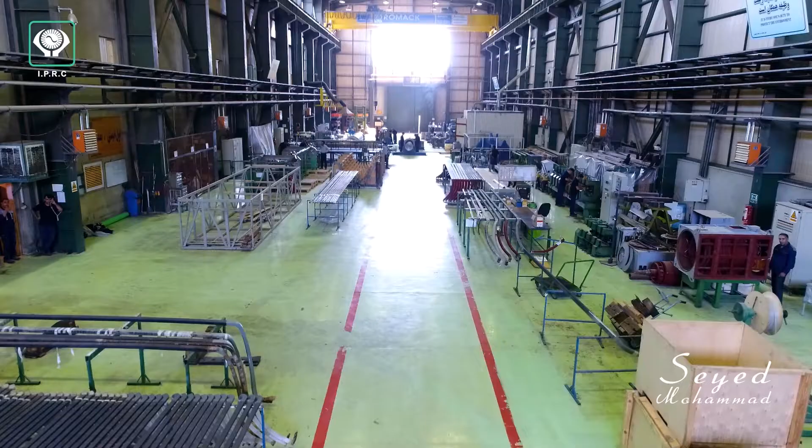This company, which is one of the affiliated companies of the Ministry of Energy, was established in 1981 under the name of Fundamental Management of Tavanir Repairs, whose goal is to support the production of sustainable electricity with the policy of specialized repairs and also be present at the front line of power plant repairs.

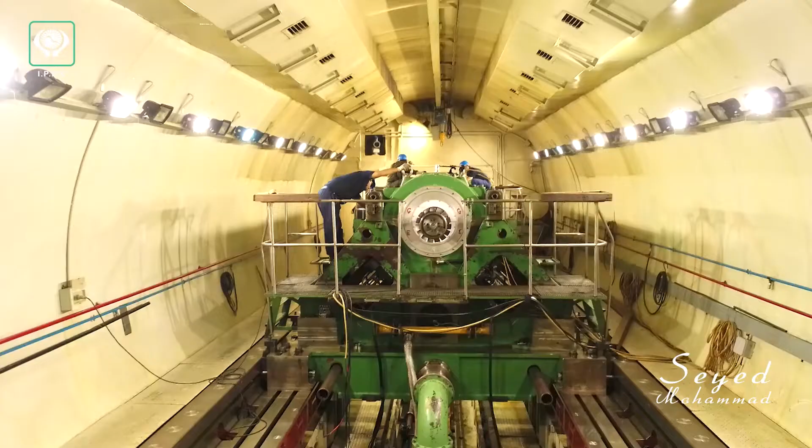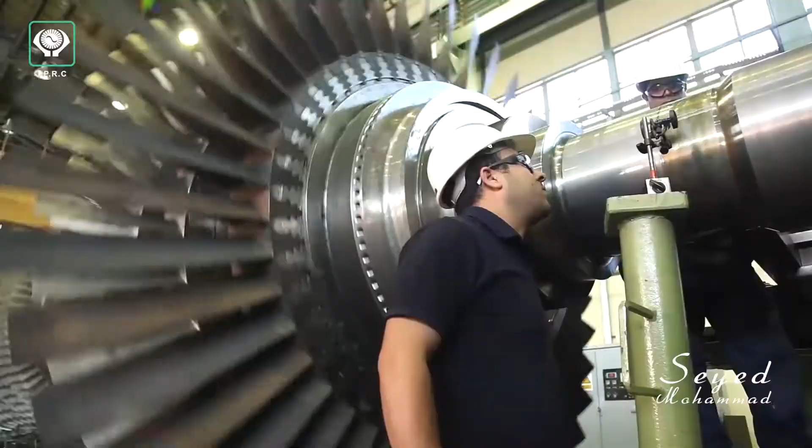After several periods of changes, the name of the company was finally changed to Iran Power Plant Repairs Company in 2002. Now, Iran Power Plant Repairs Company, more dynamic than before and with a competitive strategic look at the regional and international levels, with its experienced specialists in the country's power industry, continues its activities to achieve self-sufficiency and meet national requirements.

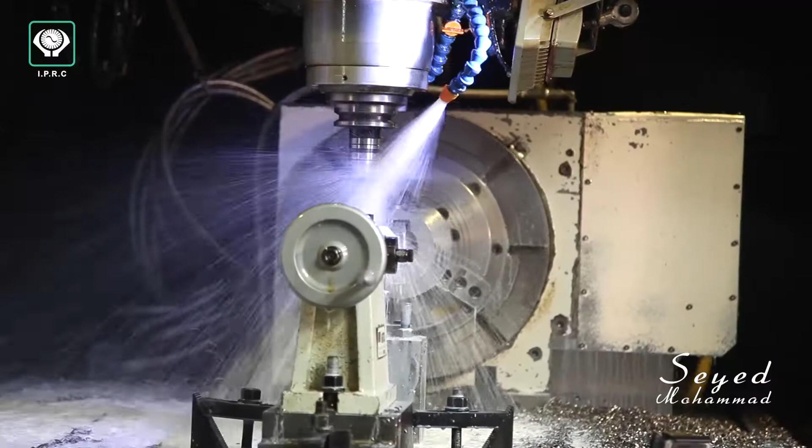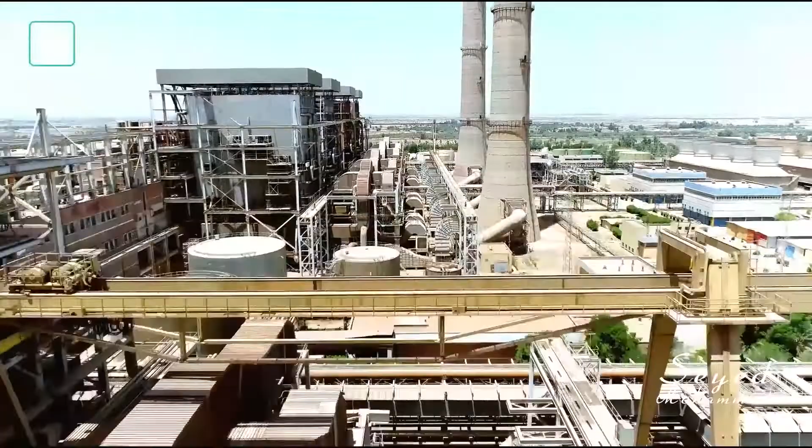During several decades of its activities, this company has successfully accomplished countless power plant projects inside the country and neighboring countries, whose results are highly precious experiences for the company. The existence of these unique experiences as national assets, especially in the range of basic power plant repairs, petrochemical units, refineries, and other industries, is considerable.

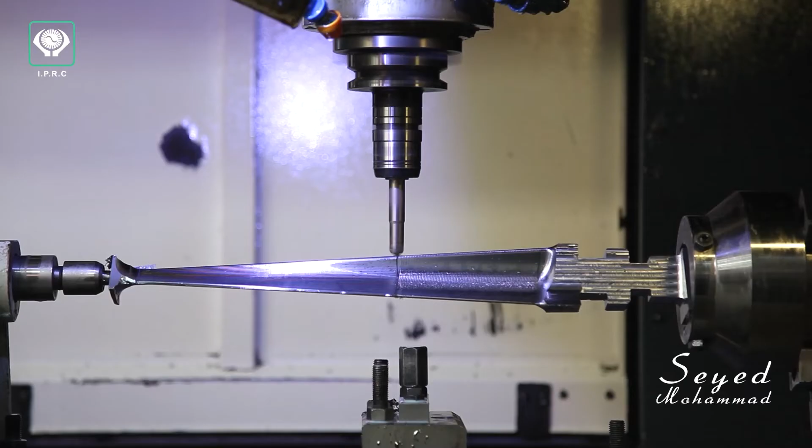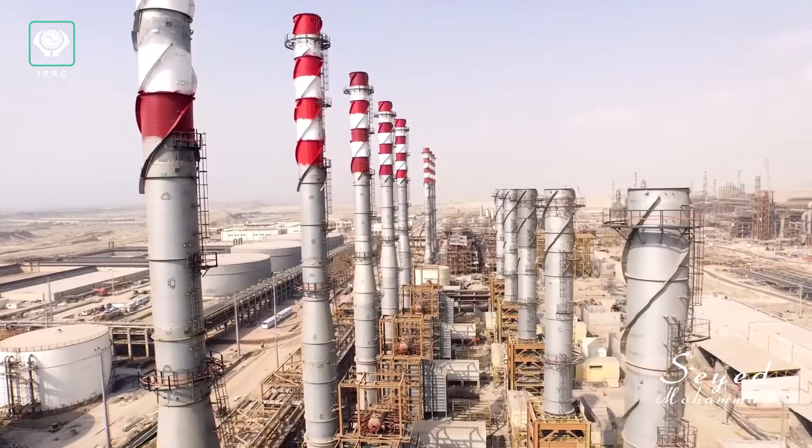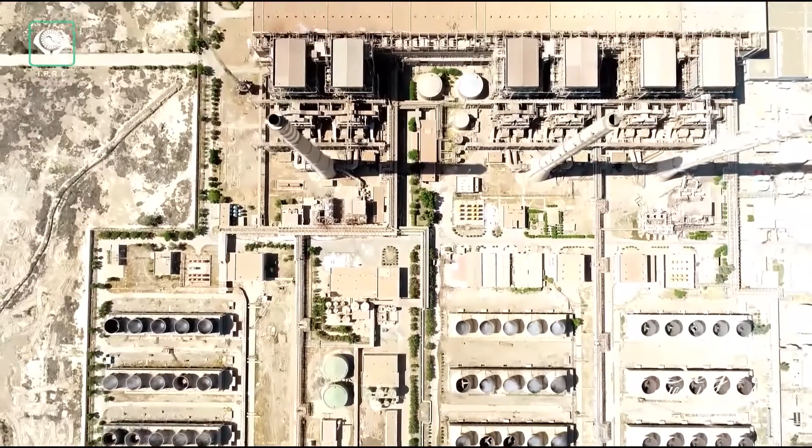The most important activities of Iran Power Plant Repairs Company regarding basic and specialized repairs of power plant units are reconstruction and upgrade, manufacturing equipment, operating and maintaining power plant units, oil, gas, petrochemical, refinery, cement, sugar, and rail industries. Iran Power Plant Repairs Company is the first specialized power plant repairs and maintenance company in the region and a leading company considering its management and technical background compared to other activists in this arena.

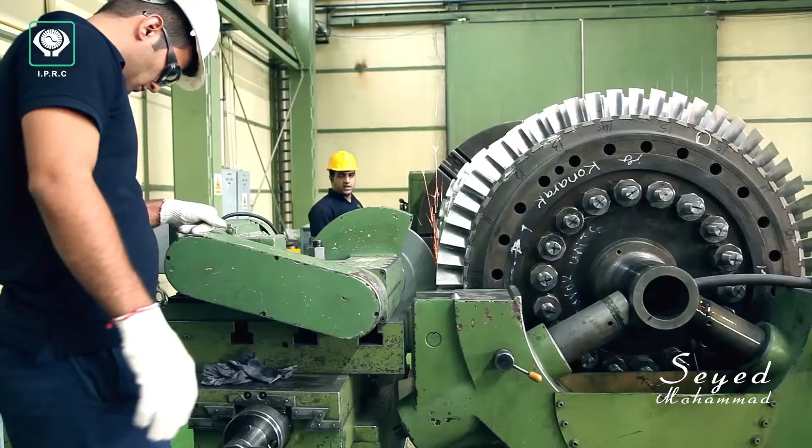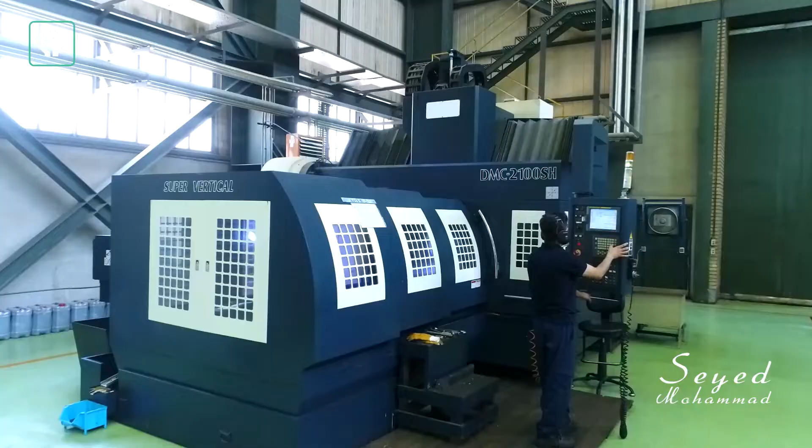In addition to technical commitments, this company is committed to preserving environmental values, health and safety, quality, and respecting customers' rights. Therefore, this company has achieved ISO 9001, ISO 14001, ISO 18001 and uses PMBOK and ISO 21500-2012 to manage its projects.

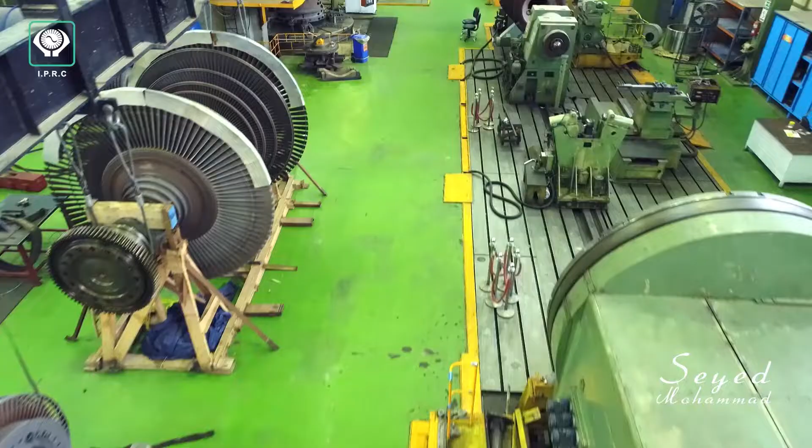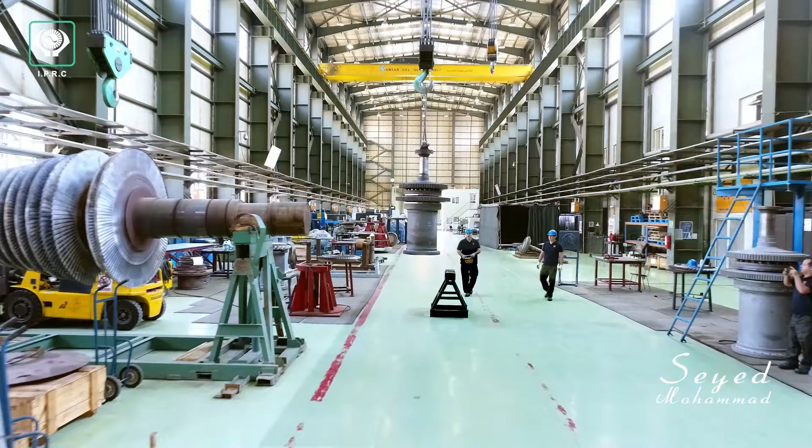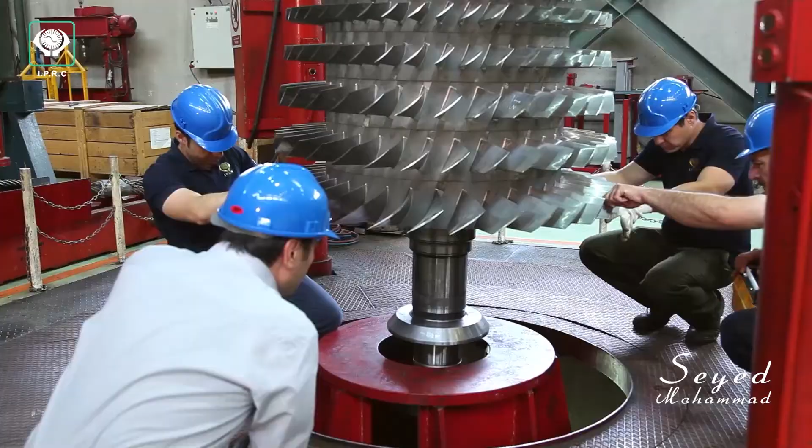This company offers its services in the form of executive units of engineering, mechanic and manufacturing, electric, and projects, which are as follows. Mechanic and manufacturing activities: fundamental repairs, upgrading and maintaining types of compressor rotors and steam and gas turbines. Assembling and disassembling, replacing types of parts and blades of all turbines and steam and gas compressors in the rotors workshop.

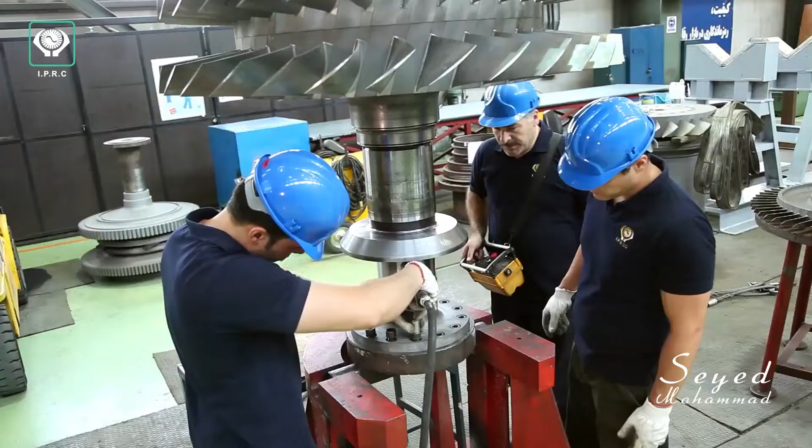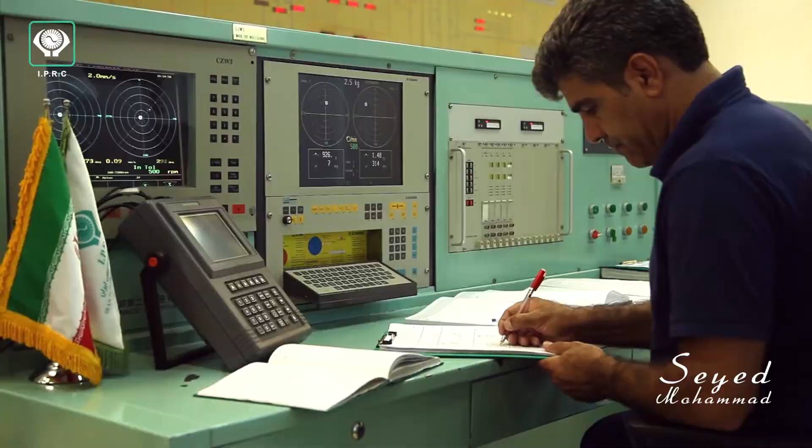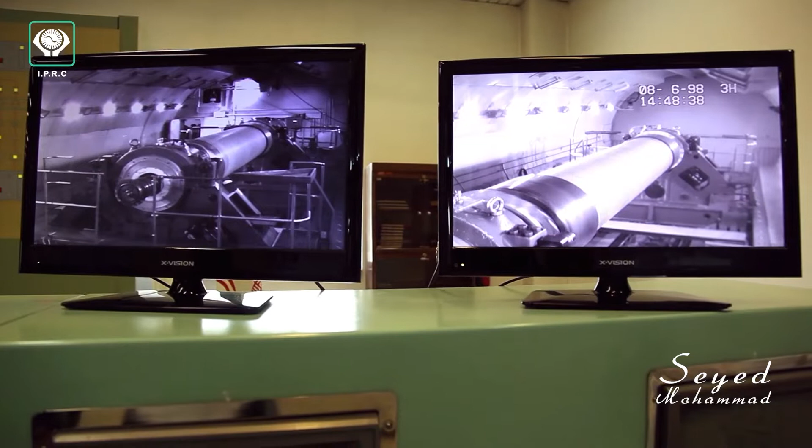Dynamic low-speed balancing up to 500 RPM with a capacity of 13 tons and dynamic high-speed balancing up to 3,000 RPM in vacuum with a capacity of 20 to 80 tons, and overspeed test up to 7,200 RPM for all types of turbines, compressors and generators with a maximum length of 15 meters in the overspeed balance workshop.

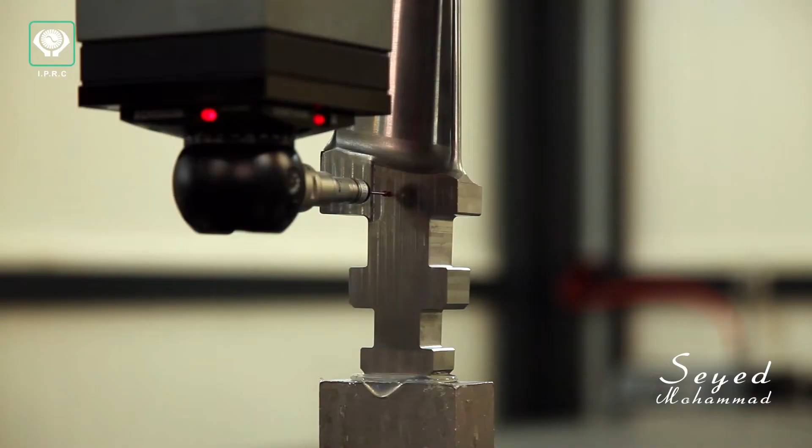Reverse engineering, including different steps of engineering measurement, modeling, manufacturing parts, steam turbine blades and steam and gas compressors, Curtis wheels and stub shafts used in power plant industries.

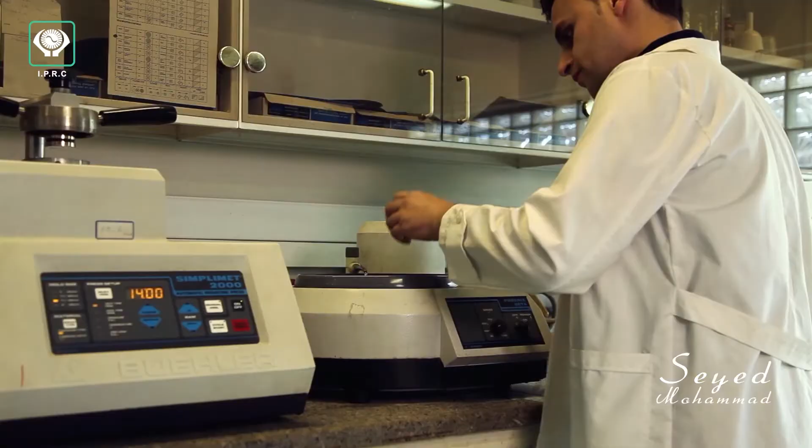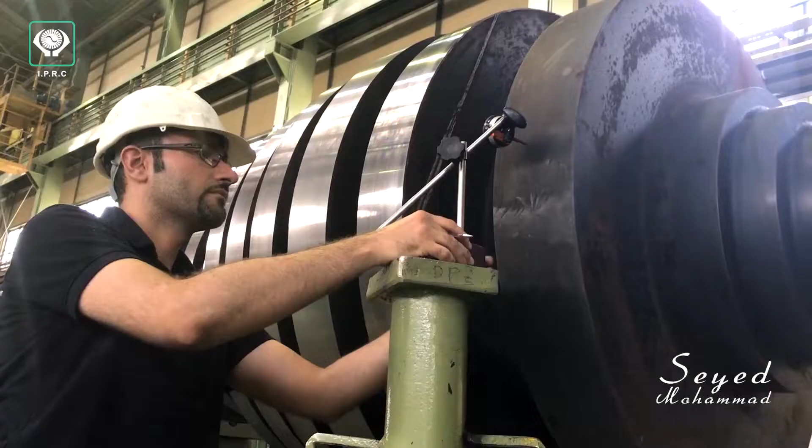Performing complete identifying tests and studying materials, destructive and non-destructive tests to determine part defects and evaluate the remaining life. Complete manufacturing of steam turbine rotors in the mechanic workshop. Different methods of welding and thermal operations of types of metals and alloy groups in the mechanic workshop.

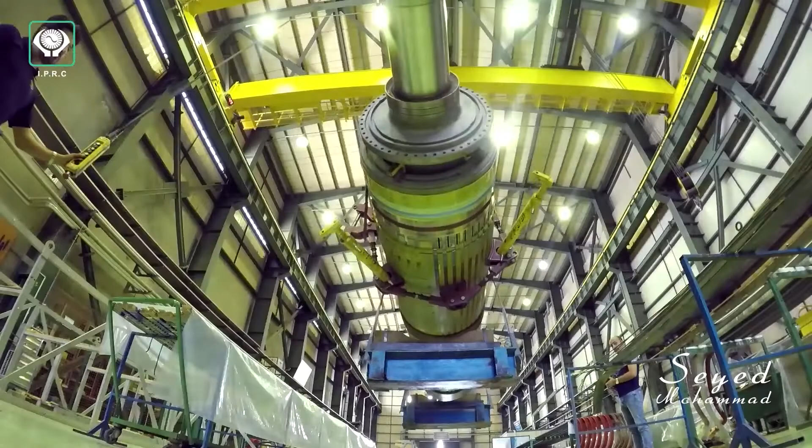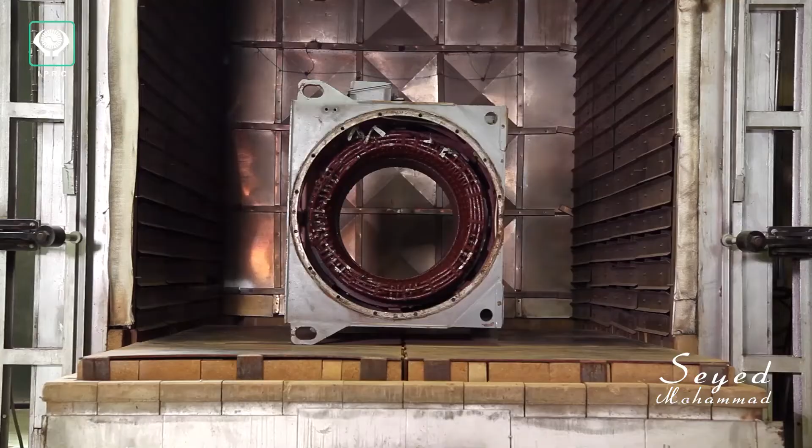Electric unit activities: reconstructing and performing basic repairs of different types of generators and high-voltage electromotors in the generator workshop, manufacturing and repairing stator cores and electromotors in the generator workshop, manufacturing types of copper bars at world quality level in the generator workshop.

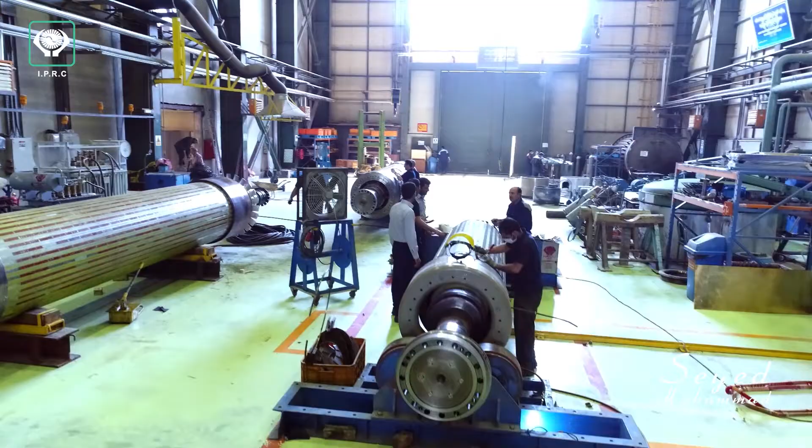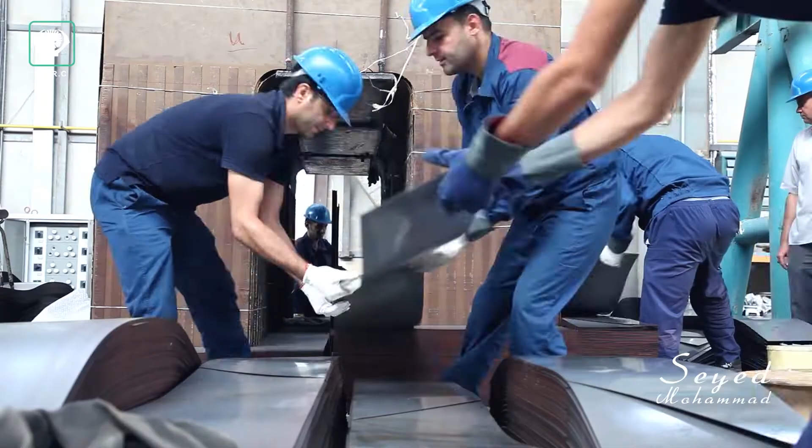Overhauling of different types of generator rotors; assembling and disassembling, reconstructing, performing periodical maintenance and overhauling of types of power transformers, shell and core types, and reactors. Repairing and installing tap changers, overhauling and replacing core plates, treating oil and drying transformers by spraying oil and VPD furnace with a capacity of 300 tons in the transformer workshop.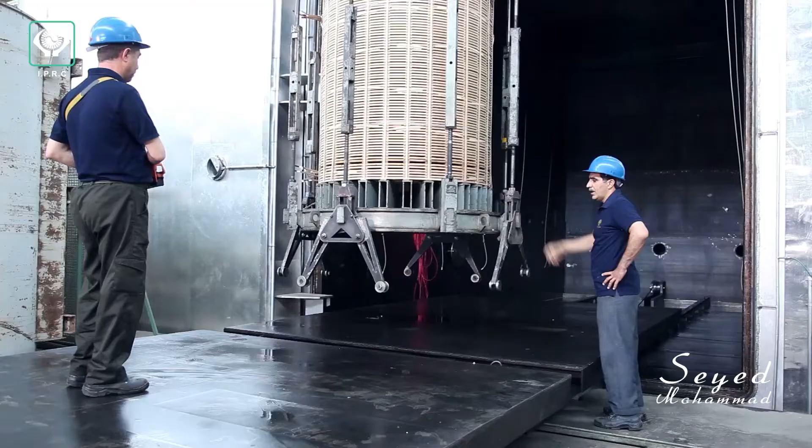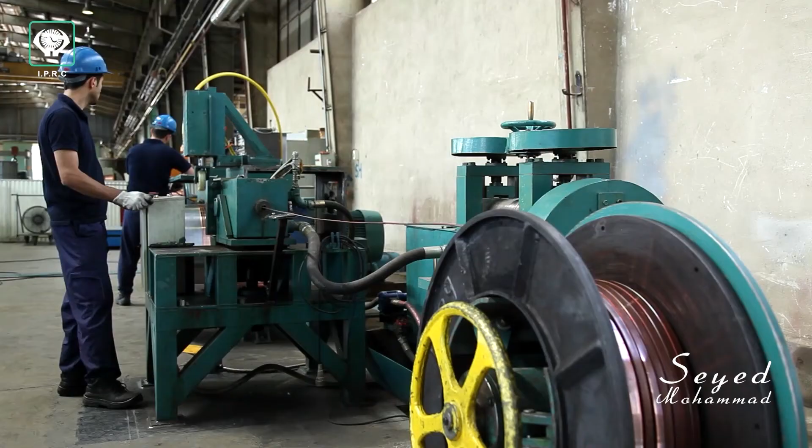Manufacturing transformer coils up to 400 kV. Extrusion and cold rolling of types of wires and copper connectors in the coil workshop. Electric tests of different types of generators, transformers, reactors, electromotors, and high-voltage equipment in the test workshop.

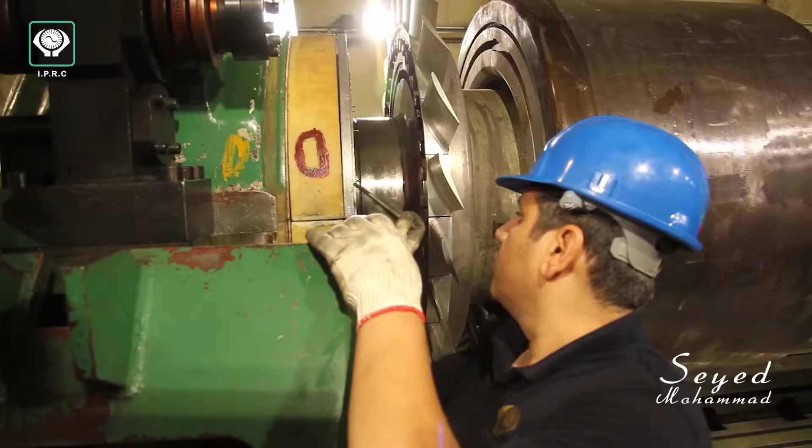Research and Engineering Technical Unit. Activities of Research and Engineering Technical Unit are as follows. Connection with the employer's technical section in order to exchange technical knowledge and upgrading engineering output documents and matching them with the standard requirements. Designing and manufacturing auxiliary, facilitating and precise equipment of repairs and services.

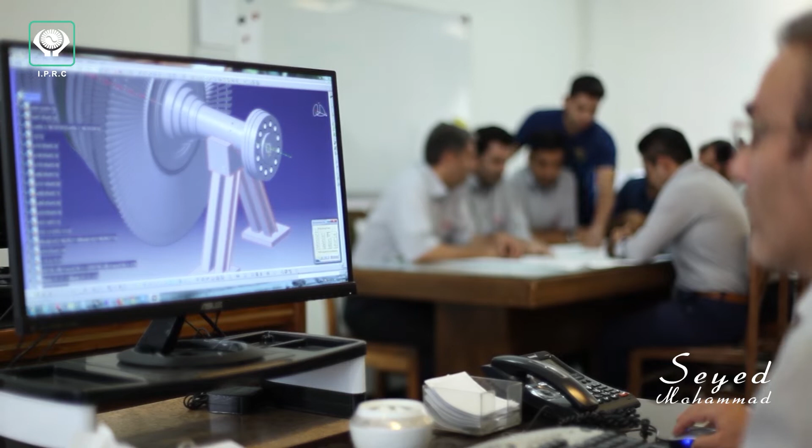Studying international standards of manufacture and repairs in order to localize and implement them in the company. Studying new operational methods for improving work and time processes to optimize manufacturing and repairing projects.

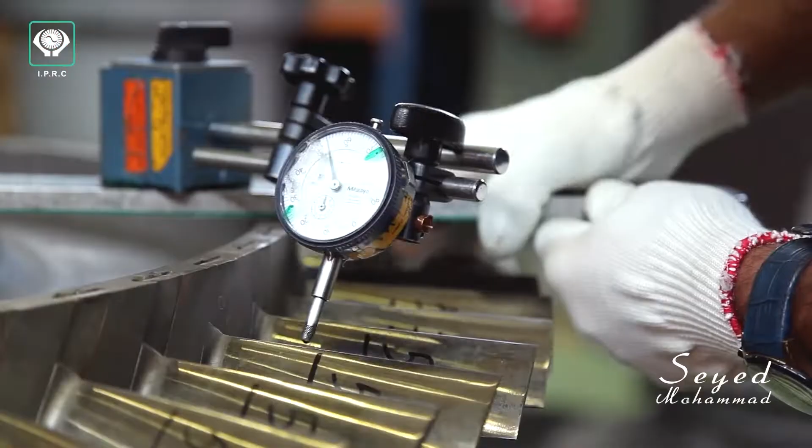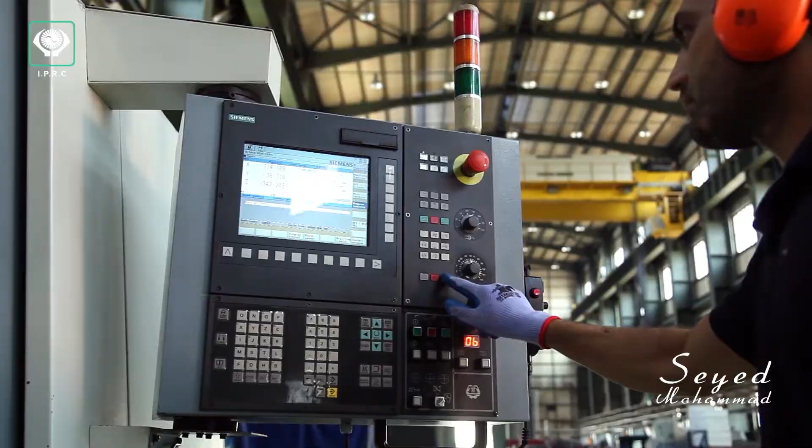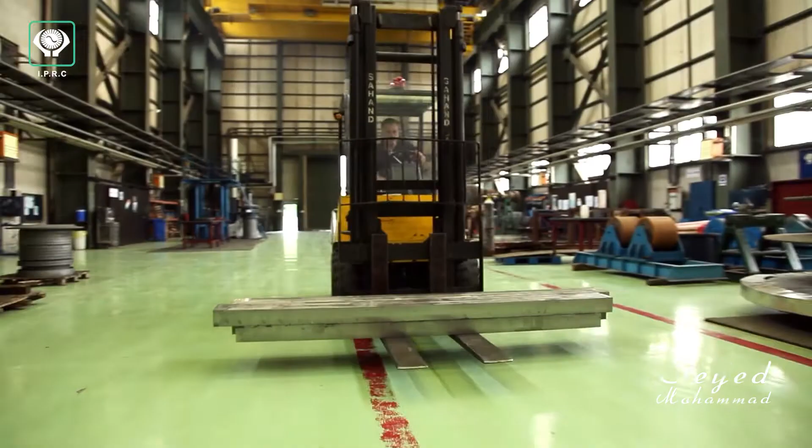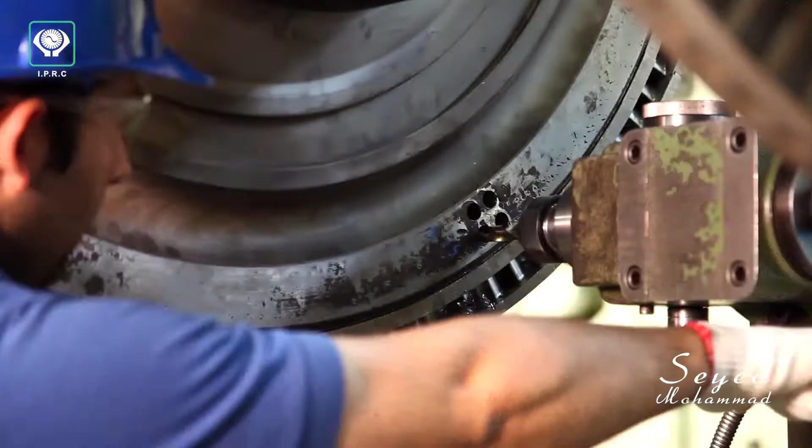Equipment. The availability of efficient equipment proportional to the requirement of the power plant industries along with the experience and technical competence of the personnel has changed this company to the pole of power plant engineering, repair and maintenance in the country that is unique in the region. The equipment in each section is as follows.

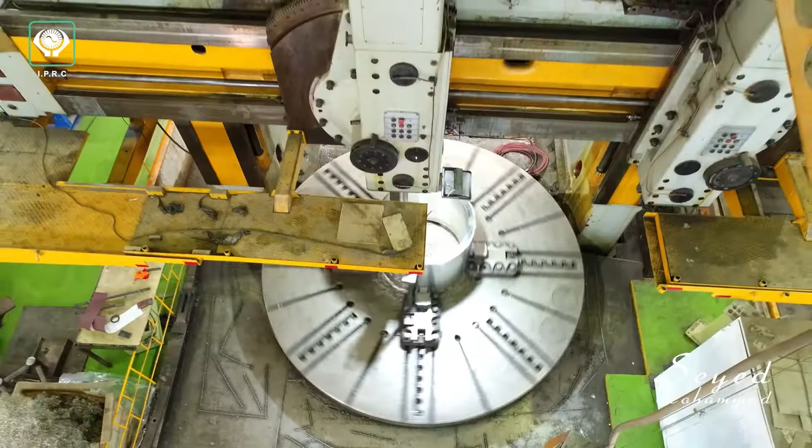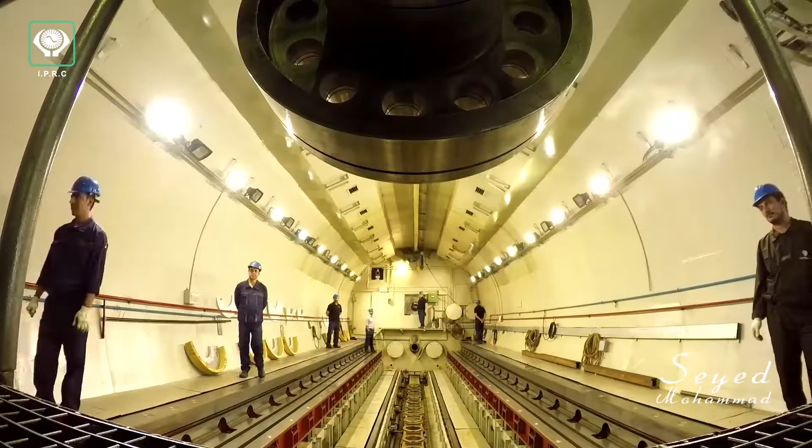Mechanic and Manufacturing Unit. Types of light and heavy lathe machines with different sizes and weights for any kind of lathing. Equipment for dynamic balancing different types of rotary equipment with the capacity of up to 80 tons by providing vacuum conditions. Assembling and disassembling equipment for all types of turbines, compressors, and generators.

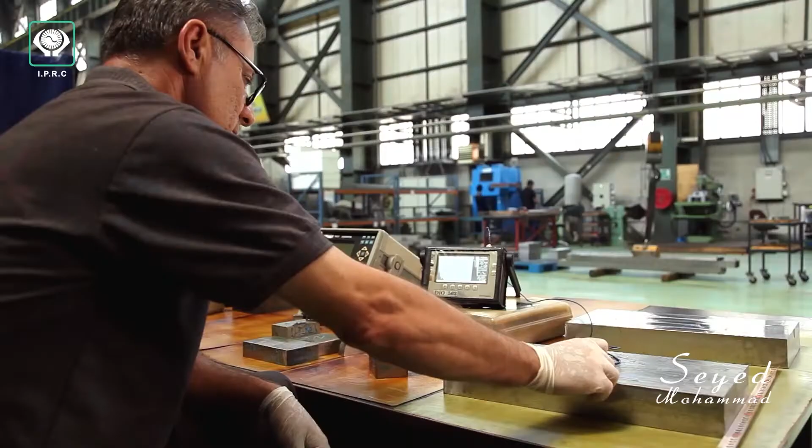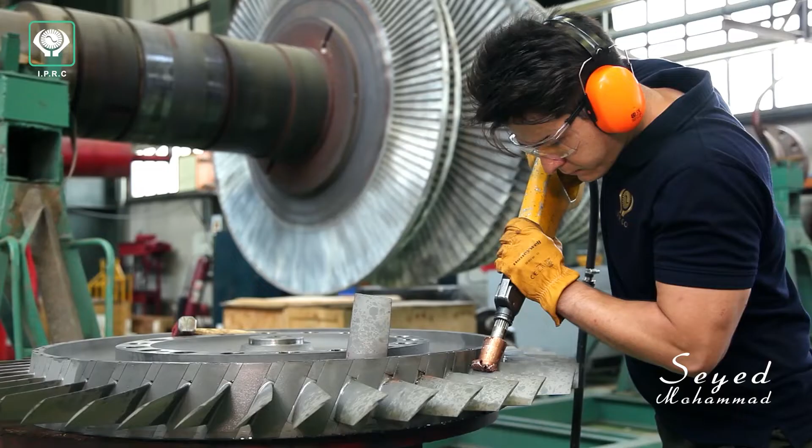Advanced laboratory equipment for materials and destructive and non-destructive tests. Fixed and portable CMM precise measuring equipment. Equipment for blading and taking their moment to be installed in turbines and compressors. CNC machinery including 3-axis, 4-axis, and 5-axis.

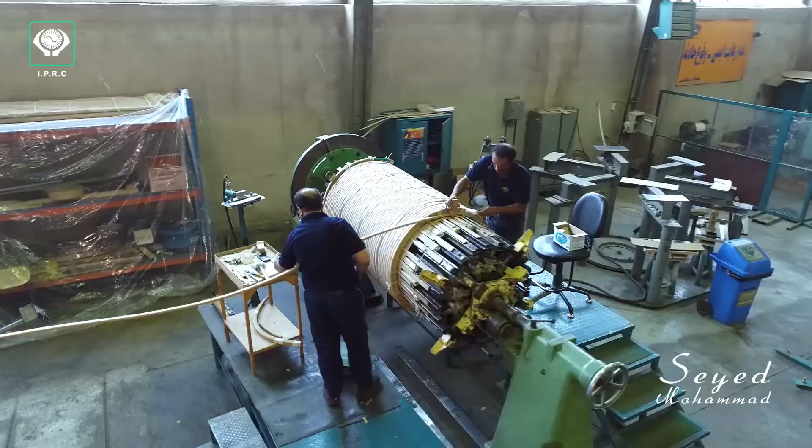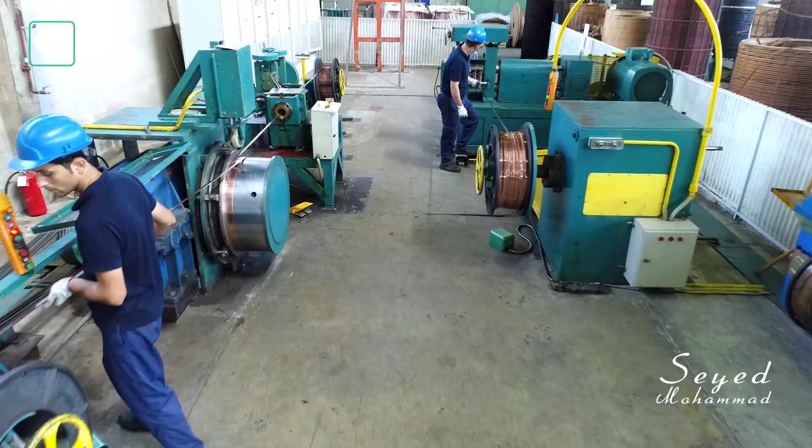Electric unit. Different types of equipment for vertical and horizontal windings for different types of transformers with different capacities. Drawing, forming and cold rolling of different types of copper connectors and wires. VPD furnace for dehumidifying insulators of the active parts with the capacity of 300 tons of weight.

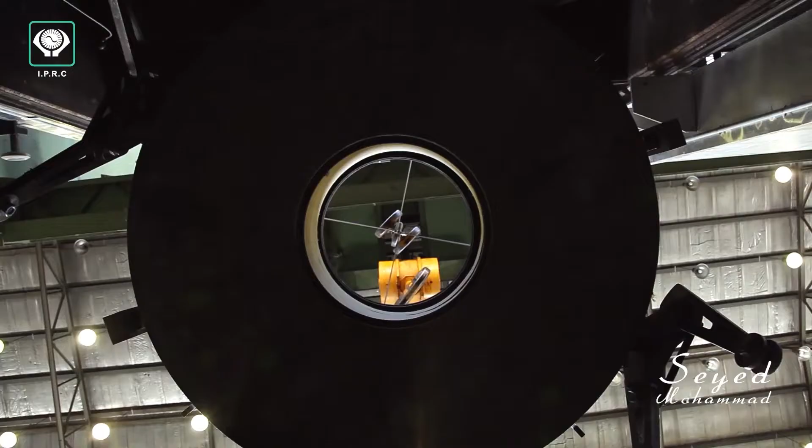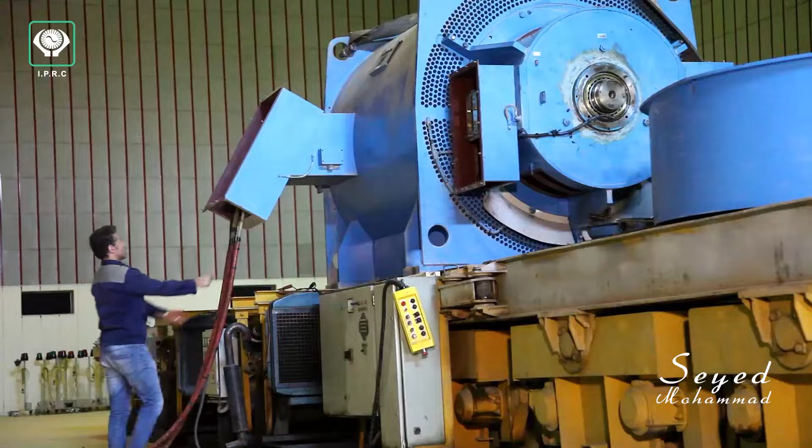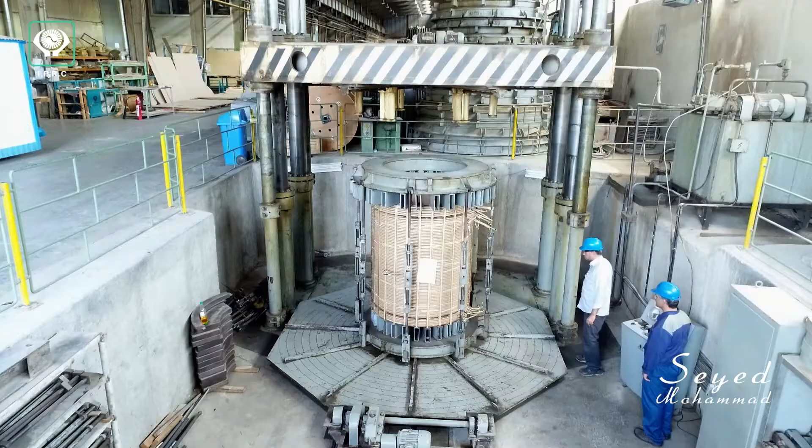Complete equipment for overhauling of generator and power transformers. High voltage equipped laboratory with the specialist equipment for testing of generators and transformers. Complete equipment for manufacturing copper bars of power plant generators with different capacities. VPI furnace for injecting resin for manufacturing stator coils.

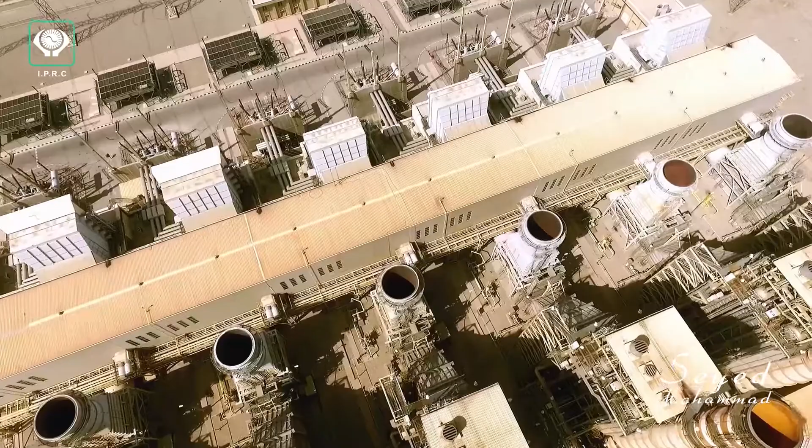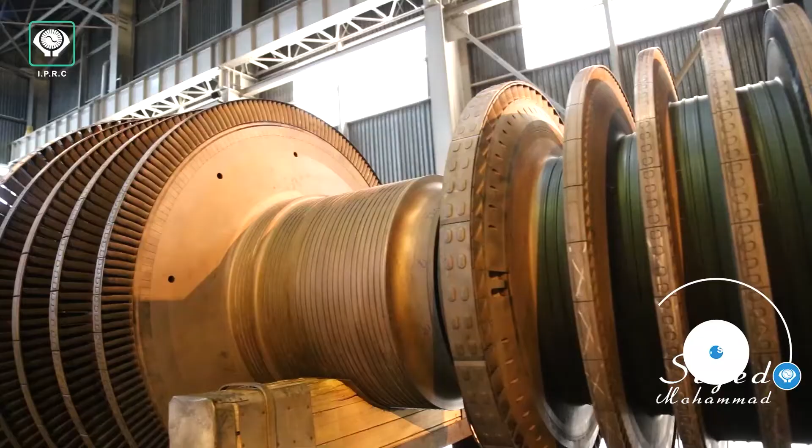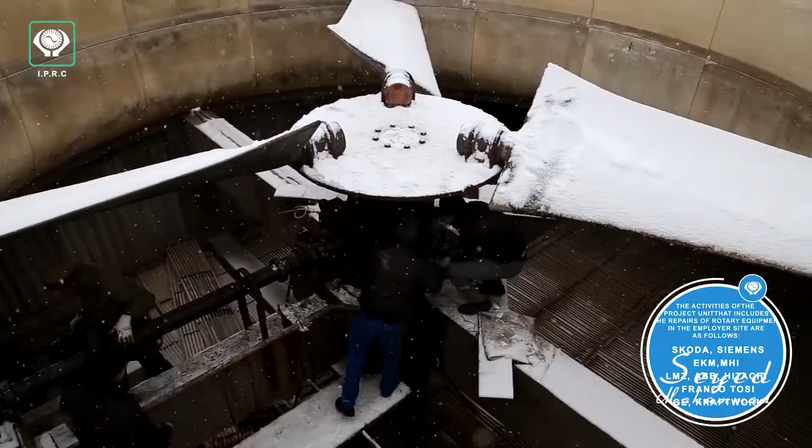Project unit. The activities of the project unit that includes the repairs of rotary equipment in the employer's site are as follows. Overhauling of different types of gas units, upgrading V94.2 gas units to V94.2/5 and V94.3 gas turbines. Performing destructive and non-destructive tests on assembled and disassembled parts of steam and gas turbines.

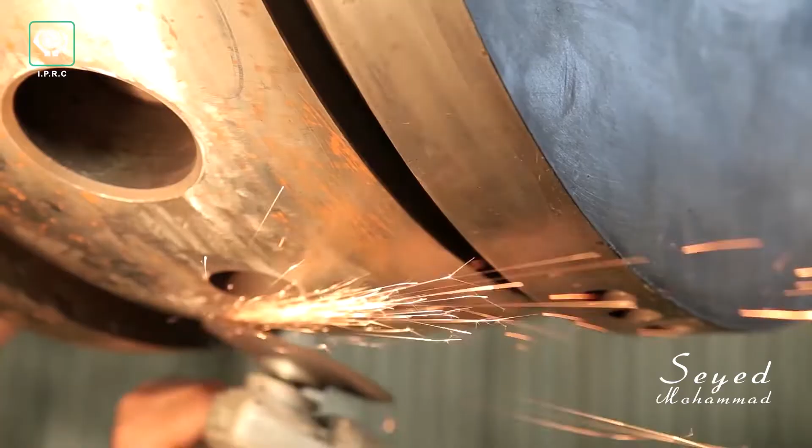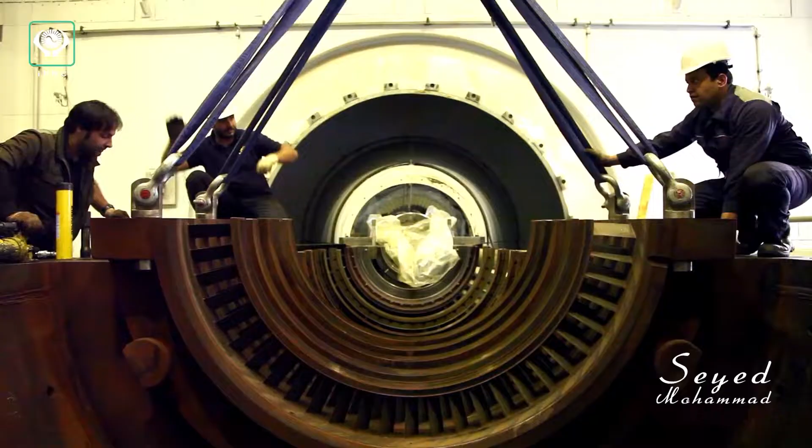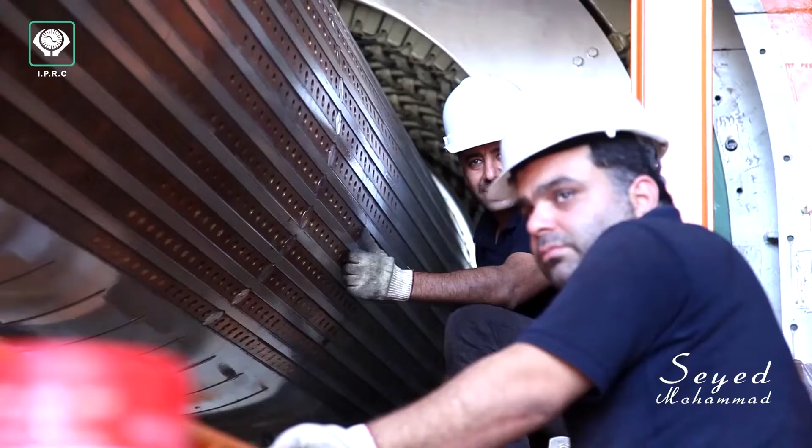Analyzing vibrations and correctional maintenance of steam and gas turbines. Overhauling of electric equipment and instruments. Overhauling of rotary system guards. Overhauling of power plant auxiliary system. Overhauling of power plant site systems. Overhauling of parts of electric motors.

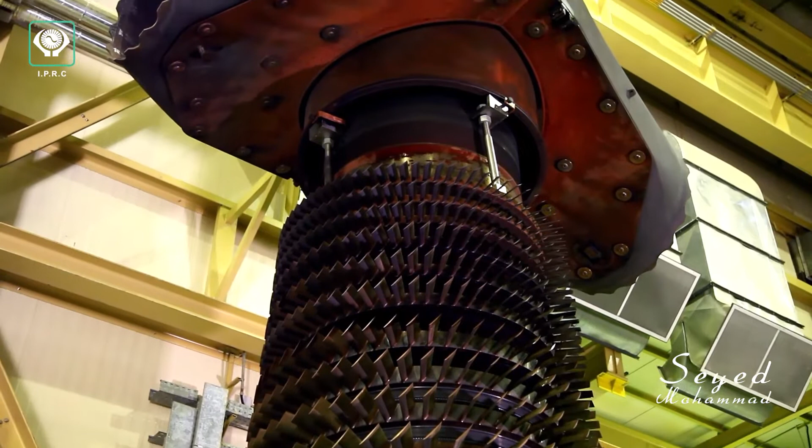Inspecting and performing fundamental repairs of pumps and valves. Performing periodical repair and maintenance of power plant units. Partnership in overhaul supervision of Bushehr power plant steam turbines. Installing gas, steam, water, and combined cycle units based on manufacturer's instructions. Simultaneous performing of more than 15 different projects at the employer's sites out of the company.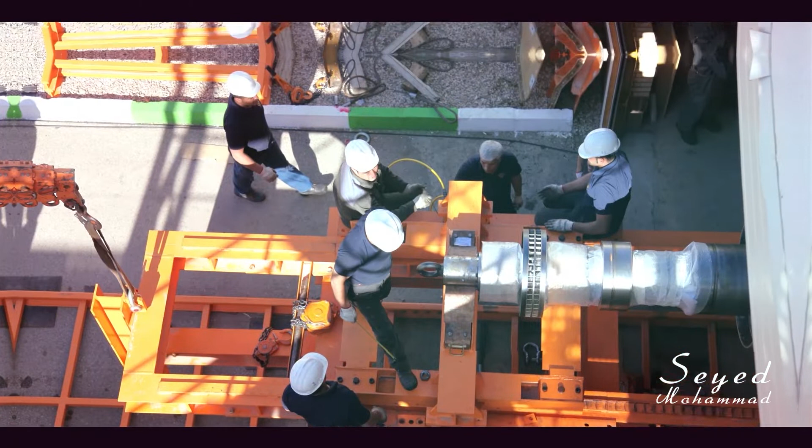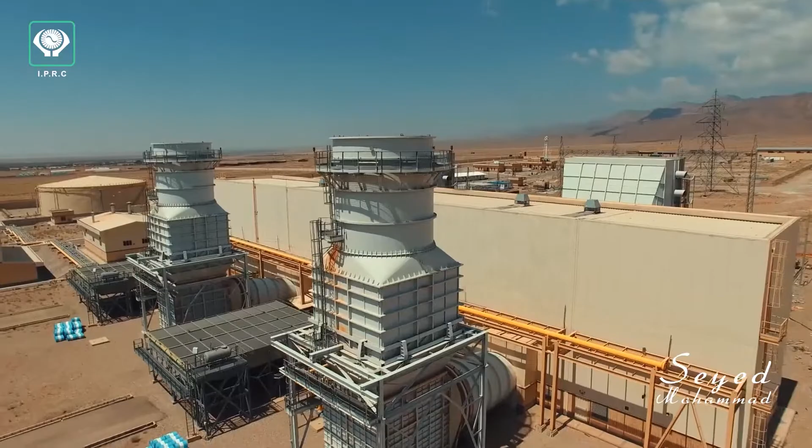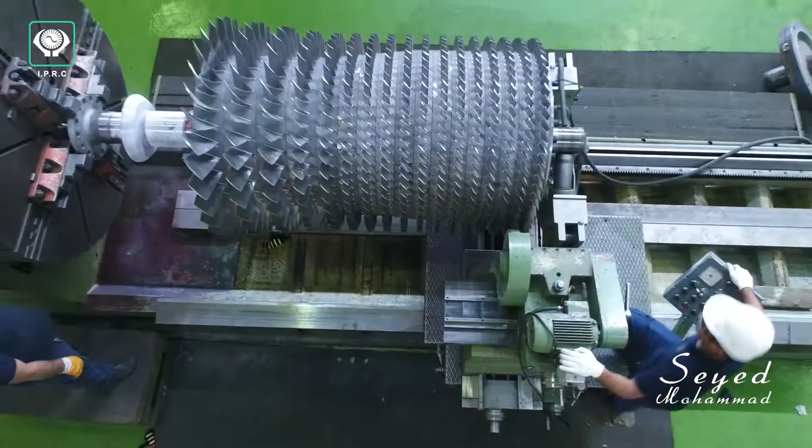Mission, scope, and eminent objective of the company. Promoting customer satisfaction. Promoting personnel's scientific and technical knowledge. Promoting the quality of engineering and technical standard services, repairs, maintenance, manufacturing, and installing equipment in the scope of energy.

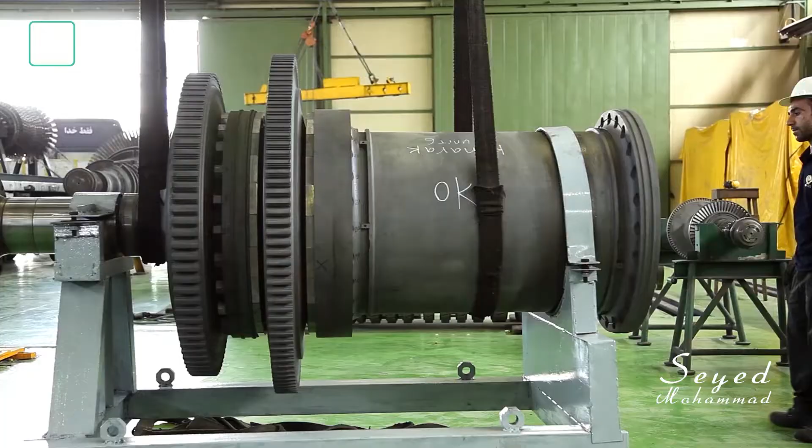A leading organization at national and regional levels in repair and engineering services through using modern technologies and spreading specialized activities in energy scope. Maintaining the existence, growth and development of technology, sustainable development, and improving our work conditions, glory and prosperity of the company.